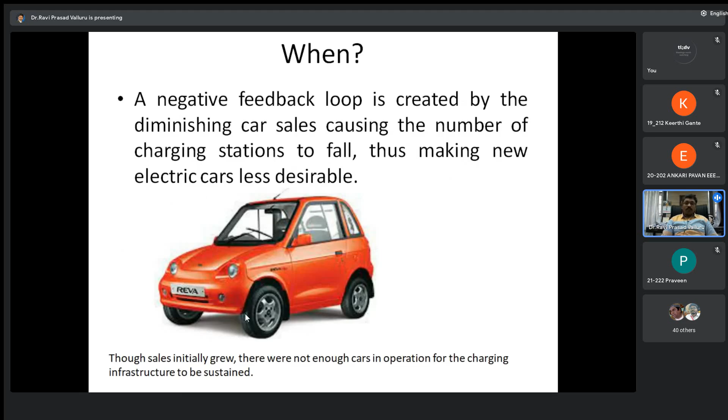So next is what, in the 5 W's and 1 H - we have seen when, where, why, what. Let's see the 'what if' condition once again, because you must know the importance of changing the thought process, changing the psychology, changing the mood, setting the pace. So what if there are more charging stations? We must ask questions to ourselves to find answers. Being an engineer, we must question ourselves and find answers.

What if there were more charging stations? Obviously, more buyers will come forward to buy cars, so automatically a positive feedback loop will start and sales will increase.

What if there were options to swap battery at regular intervals of 200 kilometers across the entire country? Then obviously I'll not have fear of charging, wasting 90 minutes of my time. I can swap my discharged battery with a fully charged battery, so customer confidence will increase. I hope you understand the importance of questioning ourselves to find solutions.

What if old EV scrappage and battery recycle facilities are rewarded? Now, whoever purchased electric scooters has to change the battery every 3 years. Old battery versus new battery, the cost difference is somewhere around - old battery gets you 800 rupees, new battery is 13,000 to 14,000 rupees for normal basic entry-level scooters. I hope you understand the price difference.

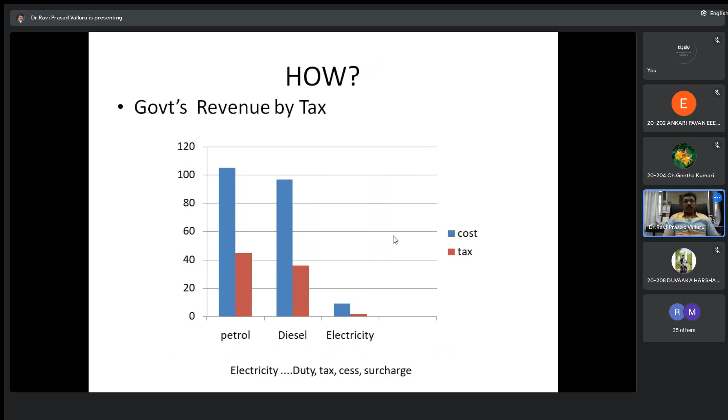So from dealer point of view, there is hope. Dealers want to switch from petrol pumps to electric chargers, because the margin is not getting affected. But why is the customer not shifting from petrol cars to electric cars? That is the question already I have posted. When, why, all these things I have posted.

So I hope you are getting clarity of all the stakeholders. I'm telling some of the overall fears, why electric vehicles are not sold in large numbers like petrol cars and diesel cars.

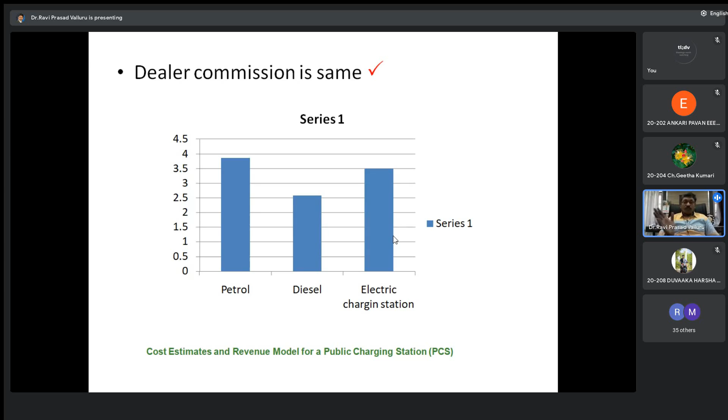There are a lot of petrol and diesel cars, 140 crores. There are only 1.4 million electric vehicles. I'll show you some interesting statistics. As an engineer, we must read newspapers, we must listen to news, we must see the business part of the newspaper, maybe in the seventh or eighth page.

So now my question is, who is responsible for all these things? I told you when, what, why, how, all these things. Now the question is, who is responsible? Yes, automatically engineers and technocrats are responsible.

All of you young engineering graduates, you are responsible for making EV successful. Engineers and technocrats are responsible. So the EV revolution will require more engineers. That is the reason why Naresh has arranged this seminar.

I hope you understand why the seminar is organized, why your institution has an Institution's Innovation Council, IIC. Because until and unless we don't come up with new ideas for old problems and new solutions for existing problems, we cannot overcome this hurdle. The hurdle is there are fewer EVs and more IC engine vehicles. IC engine means internal combustion engine. So the EV revolution will require more engineers. That is the first benefit.

Next thing is, electric vehicles are part of the fourth industrial revolution. If you had studied your history, geography, economics, civics properly in 10th standard, you would know what is meant by industrial revolution. Now the world is going through the fourth industrial revolution, and that revolution is brought by electric vehicles and the electric power industry.

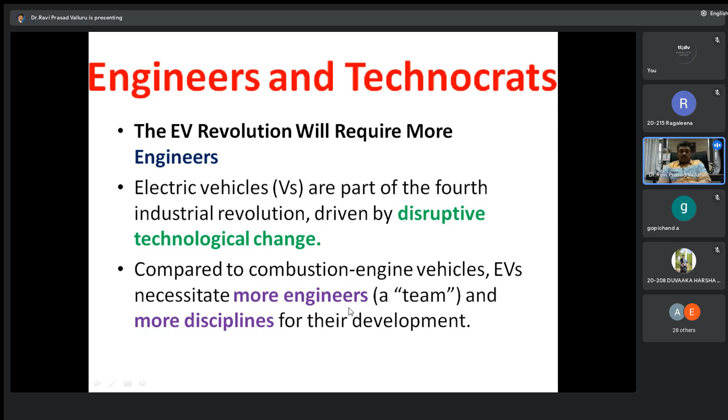Point 3 in this slide - I told you EVs need more engineers. Okay, why are more engineers needed? Why regular petrol and diesel cars? In a regular petrol car and diesel car, an engineer designs the valves once. A technician, a diploma holder or ITI holder will make them using a lathe in a workshop.

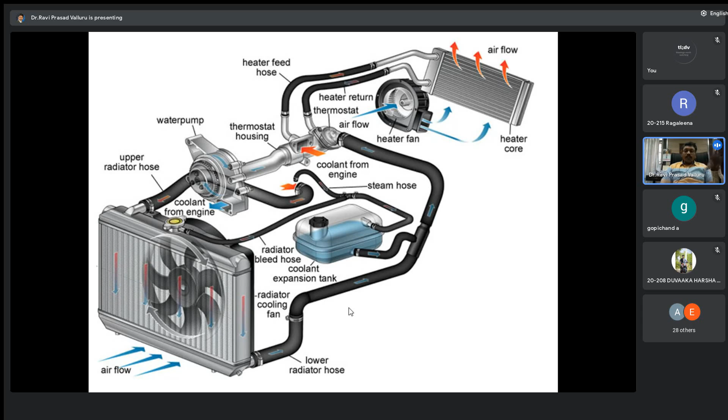Okay, this is the cooling system. The engine gets heated up because petrol or diesel gets combusted inside the engine, and the engine has to be cooled. So this is the radiator, the coolant, and the coolant pump mechanism in a regular car or lorry, whatever it is.

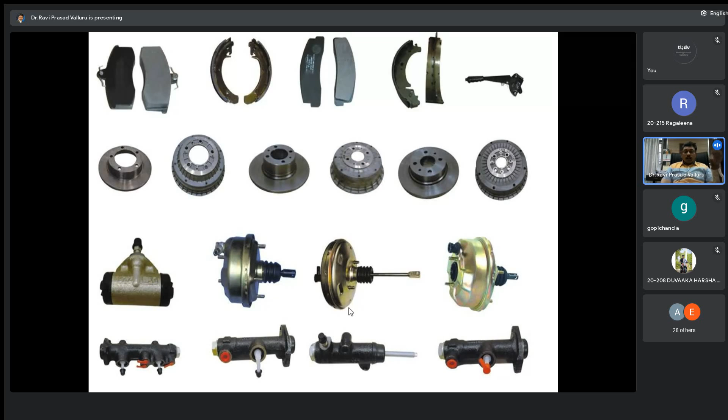So this is the braking system in a regular car - we call it power brakes. There has to be a brake cylinder, brake distributor, disc brakes, drum brakes. All these brake lines have to be connected, and the brake distribution has to be done. This is the mechanical setup in regular cars, and these are the parts: brake shoes, brake pads, brake drums, cylinders, valves, all these things. So many parts are there in this braking system.

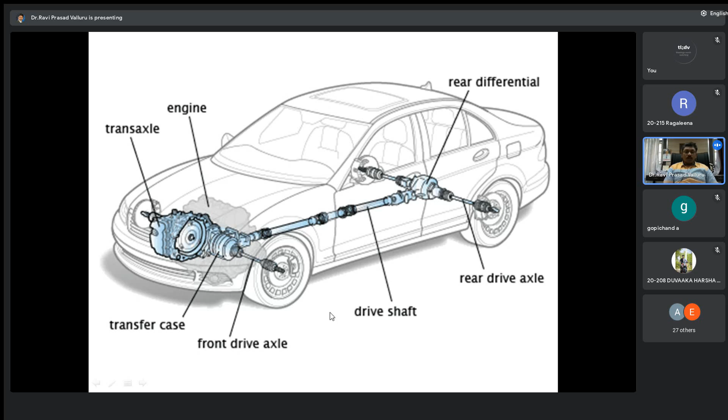But majority of modern cars are front wheel drive. This is a four-wheel drive car, so the engine is connected to the rear wheel as well as the front wheel. Only front wheel driven we call front wheel drive, only rear wheel driven we call rear wheel drive. If it is driven by all wheels, we call it AWD, all wheel drive, or generally 4x4, meaning all four wheels are connected to the engine.

This is a rear wheel drive axle. It has a lot of parts, and all these parts have to be manufactured by lathe machine operators in a workshop. You would have done the lathe workshop in your first year.

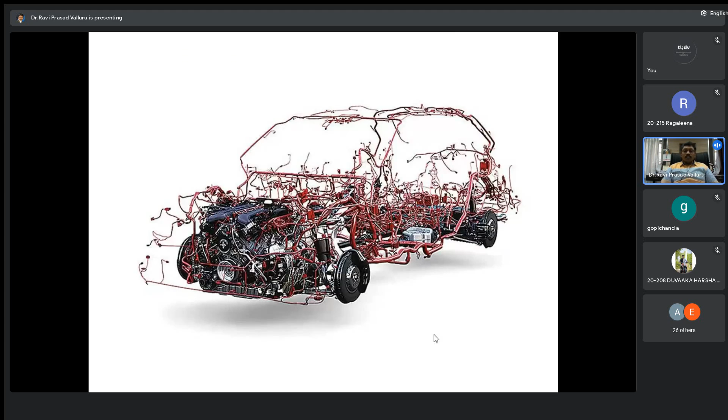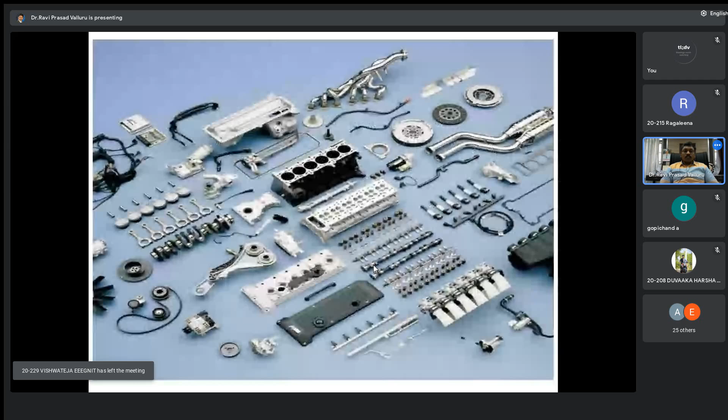I hope you understand, this is a regular car, and a regular car needs hundreds, thousands of parts. I am showing this briefly.

Dear students, did you understand what I mean to say? Yes sir, this is all about regular cars.

Very good. Now I want you to unlearn, to relearn.

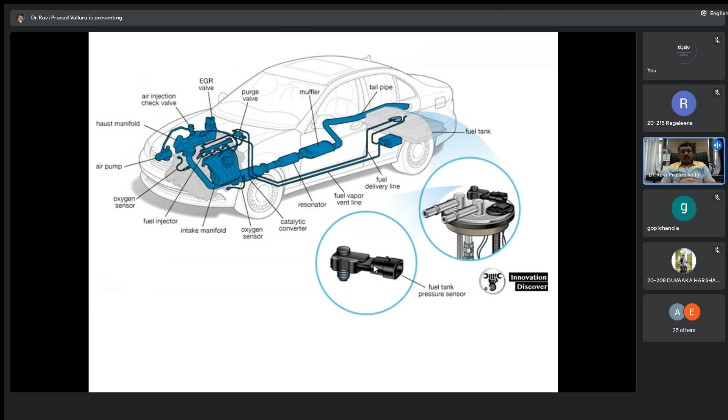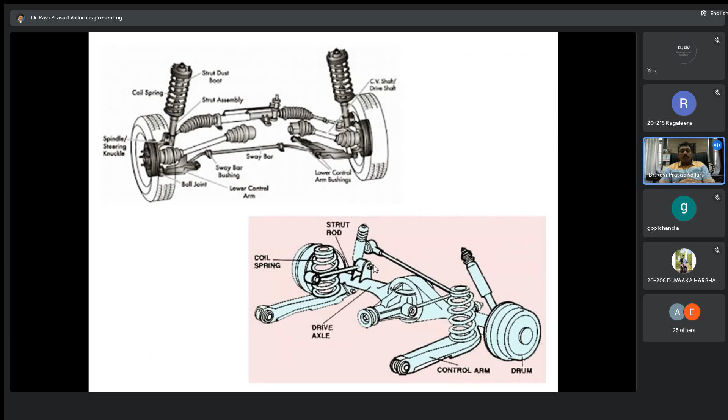This is the old knowledge: this is how AC works in a regular car, how flue gases come from the tailpipe, how wiring is done in regular cars, how the rear axle is, how power is transmitted to wheels, how suspension is, how brakes and brake distribution are, how the engine is cooled, how the gearbox looks, how the engine looks with its parts.

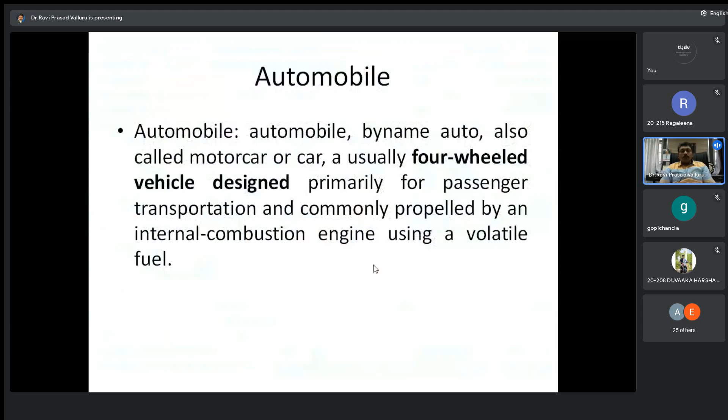I want you to unlearn all this. Forget about these things, because we are talking about electric vehicles. These things do not exist in EVs, only some of them exist, many of them don't. So I don't want you to fail. Whatever I have taught you, you have to forget those things. If you want to relearn, you first have to unlearn.

So I request all of you to unlearn, and then let's start relearning. I don't want you to fail as an engineer in life, and I don't want you to fail as a startup if you start your business. So please unlearn whatever you have learned till now, and then relearn.

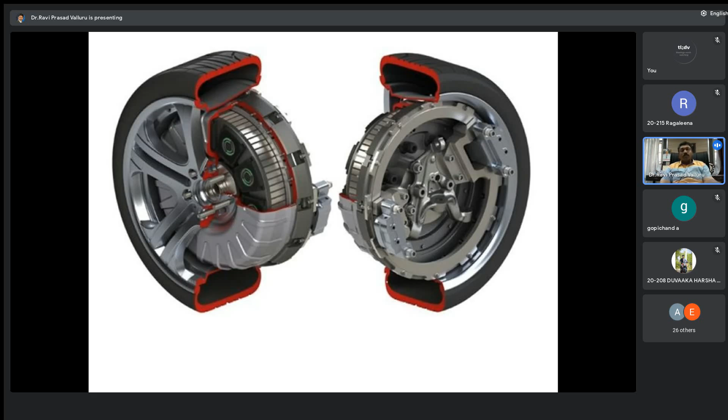The tire and rim are part of the motor. So the tire and rim form the rotor, and the stator part is visible. I hope you can see this. This is what I wanted to convey.

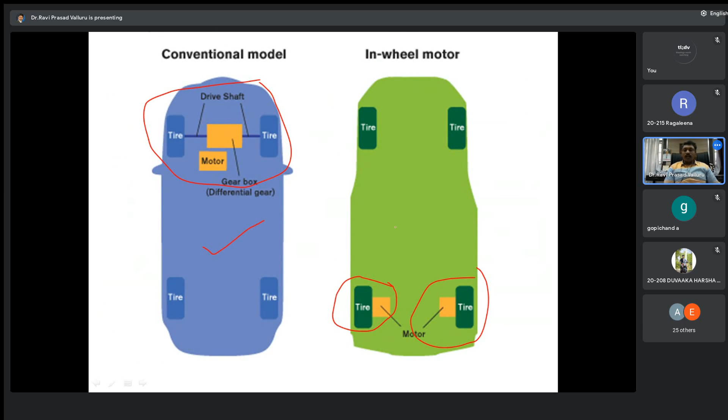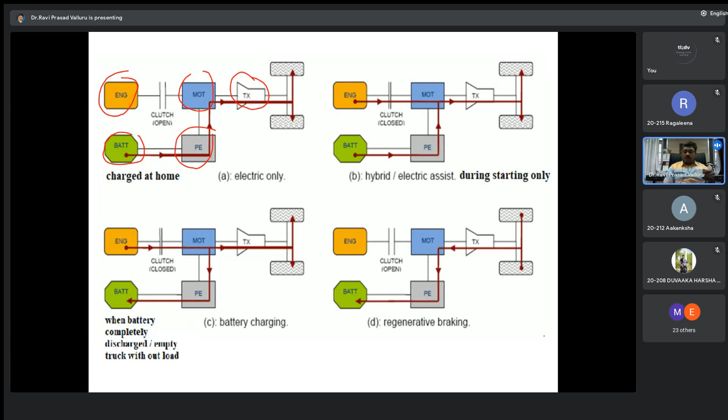A hybrid vehicle is costly because it has a petrol or diesel tank, an engine, a transmission, gearbox, clutch, all of them. Additionally, they have a motor, power electronic converter and battery. That is why hybrid electric vehicles cost in crores, electric vehicles cost in lakhs, and petrol vehicles cost in a few thousands. I'll show you that price variation also.

So this is a simple way of understanding conventional, hybrid, and pure electric vehicles. The first classification is conventional. Dear students, are you able to see the screen I am sharing, and what I am scribbling with the pointer? In conventional vehicles, that is petrol and diesel, you can start and stop, and it runs on petrol or diesel.

In mild hybrids, it runs on petrol and diesel, but when you apply brakes, or when you are coasting, or when descending from a hill, energy is recovered. Please mute yourself, we are getting noise. So energy is recovered in a mild hybrid during coasting, braking, or descending from a hill.

We call this mild hybrid. In regular conventional vehicles, there is no such recovery; when you apply brakes, all that kinetic energy is lost. But in a mild hybrid, when you apply brakes, some energy is recovered and stored in the battery, and it is charged only momentarily—not for days, just for 2 or 3 seconds—and given back in 2 or 3 seconds. So this happens in less than 1 minute.

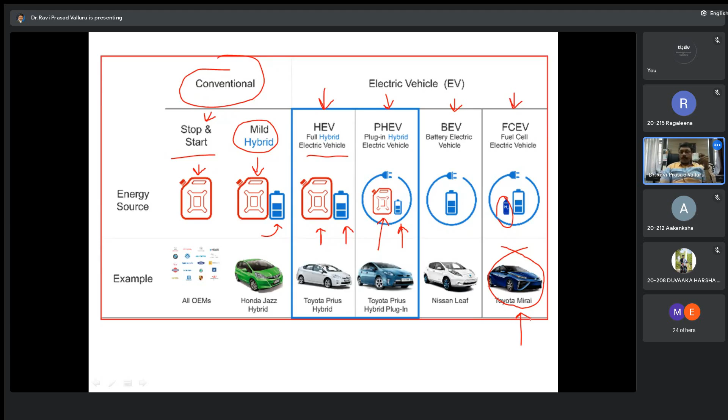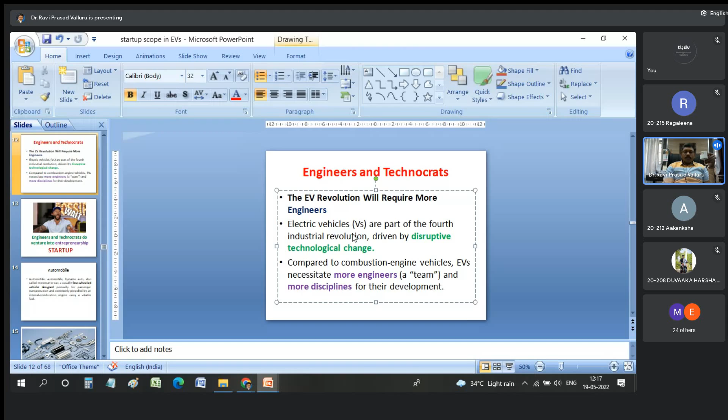Dear students, are you able to follow what I am saying? Because it's a very elaborate, very detailed topic. Do you understand? Yes, sir. Do you understand what I am saying? Are you able to follow? Yes, sir. Very good. Shall I go ahead with my presentation?

Naresh, time is 12:15. Can I continue with the presentation, or is there any time limitation? Dear audience, can I continue? Do you have any other lecture or lab session? Can I continue? Continue, sir.

Okay, thank you. Is my lecture interesting? Because it's a very elaborate topic, I have to concise it and present it for you, because you are all first year, second year guys. You don't know the ABC of electric vehicles - I have to cover that as well.

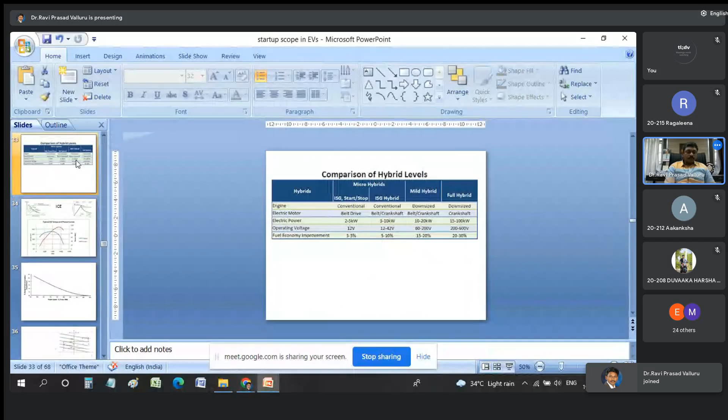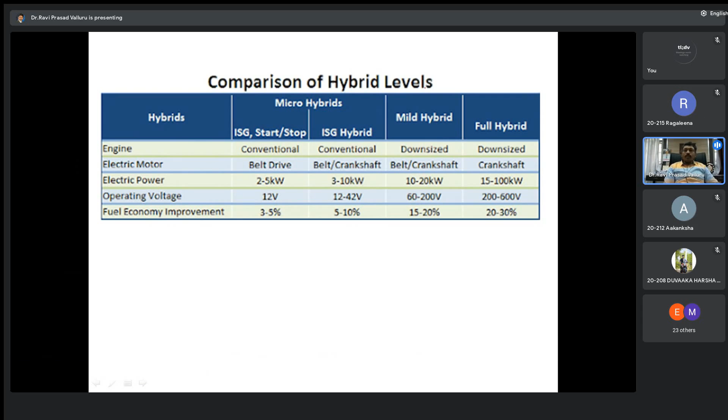So let's see, let's get back. Are you able to see the screen I am sharing? Yes, sir. Good. So now let's see comparison of hybrid vehicles - how regular vehicles differ from hybrids, how hybrids differ from battery vehicles, and how battery vehicles differ from fuel cell vehicles. I've shown you a short glimpse of this.

In a similar manner, I would like to show you in terms of electric power. People have some misunderstanding or lack of information. All these three cases are very dangerous - half knowledge is very dangerous. So it is my duty as a teacher to give you some idea.

Micro hybrid vehicles only have 2 to 5 kilowatts of power. For example, a car needs somewhere around 70 to 90 horsepower. When you convert horsepower into kilowatts, 1 horsepower is about 746 watts.

Prasad, sir, Naresh, shall we continue? Sir, your voice is not clear. Okay, am I audible now? Is my voice clear now? Yes, sir, it is audible. Shall I continue because time is 12:15? Am I messing up with your schedule? Shall I continue? Yes, sir, you can continue. You can end around 12:35, sir. Sure, I'll speed it up.

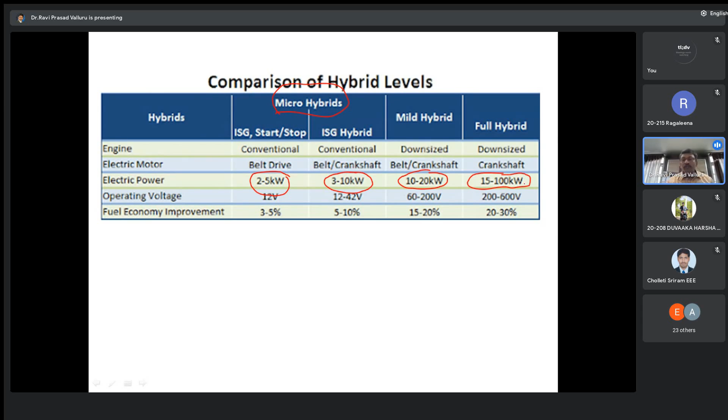I request the audience to understand how much support is given by the electrical system to a regular engine. In micro hybrid, only 3 to 5% support comes from the motor. In ISG hybrid, 5 to 10% support. In mild hybrid, 20% support comes from batteries and motor. In full hybrid, the entire power required for propelling the car is generated by the motor, and the motor gets power from the battery - whether it's fuel cell, lithium-ion, or lead acid, it doesn't matter. I request all of you to understand how much support we are getting.

Now let's see the internal combustion engine versus electric motor. If you want to understand the startup opportunities in electric vehicles, you have to understand how a regular geared petrol car is different from an electric car. You can see both graphs on the top left corner, for electric motor driven cars and IC engine cars. You cannot keep the same amount of torque - with changing speed of the car you have to change gears, as you can see with first, second, third, fourth gear. Whereas in an electric car, the torque is seamless and maintained very well.

If you are unable to understand in this diagram, you can see this. From up to some point, you can run the motor as constant torque motor. After that, you can run it as constant power, variable power, constant power. This is the advantage of electric vehicle, which is not available in a regular petrol or diesel car.

For getting this kind of constant torque and variable torque, or constant power and variable power features, you have to shift the gears. Torque and speed are not constant, torque and power are not constant in all the gears. You have to run the engine at ideal speed, and you cannot run the engine at ideal speed without increasing the speed of the car. It is not possible in traffic.

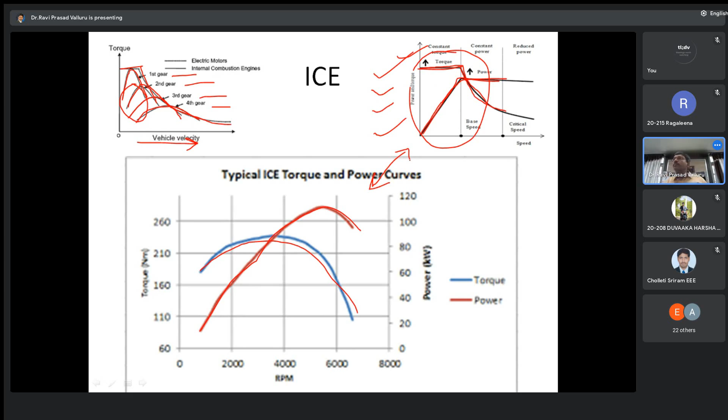You can see the difference between the petrol cars and the motors. This is where you can identify how the fuel efficiency drops in petrol cars. This is where we have opportunity.

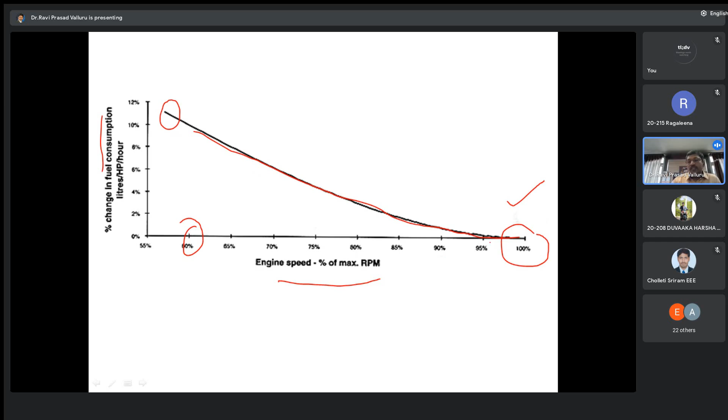You can switch from forward motoring. If you are a second, third, or fourth year student, you will know what is forward motoring and forward braking. This is the speed-torque characteristics of a DC motor. This is speed, this is torque. This is negative torque, you can say this is minus T. Speed is always positive, but torque is either positive or negative.

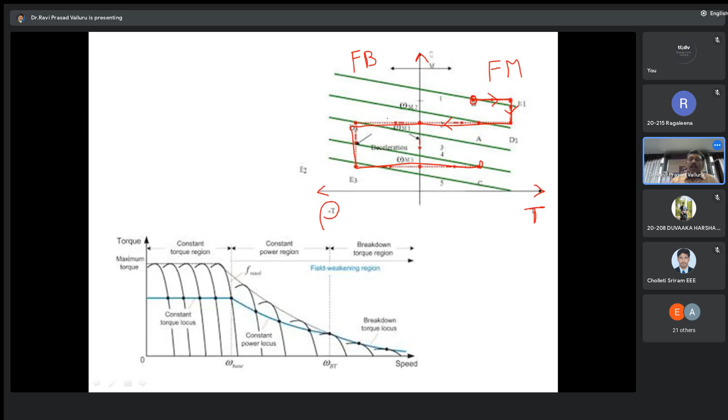So if your motor is operating in forward motoring, you can switch it to forward braking in this manner, and you can stop the car and once again start it from a slower speed. This is the path. This is not like your regular IC engine, this is not like your regular brakes. This is called electrical brakes. This is how we can switch from forward motoring to forward braking efficiently, effectively, without a short gap also.

You can reduce the speed. Say for example, it is running at 100 kilometers at this point. You can immediately switch it to 10 kilometers in a short notice. You can bring it to here. From here to here, you can reduce the speed using this method. This is taught in the PSD subject. This is how your motor operates.

This is the speed-torque characteristics of an induction motor. This is how speed control is done. Some of you may be familiar with speed control: constant torque region, constant power region, breakdown torque. These are different speeds of electric motor, and electric motor is used for electric cars.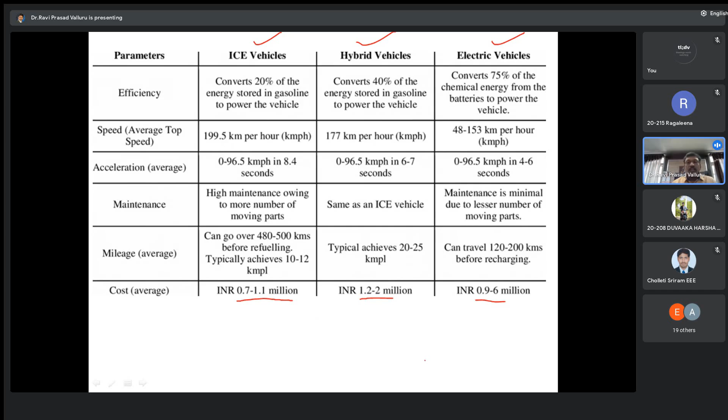Once again, in electric vehicles, we also have fuel cell based vehicles. So I'll share this presentation with Naresh, you can read it when you are free.

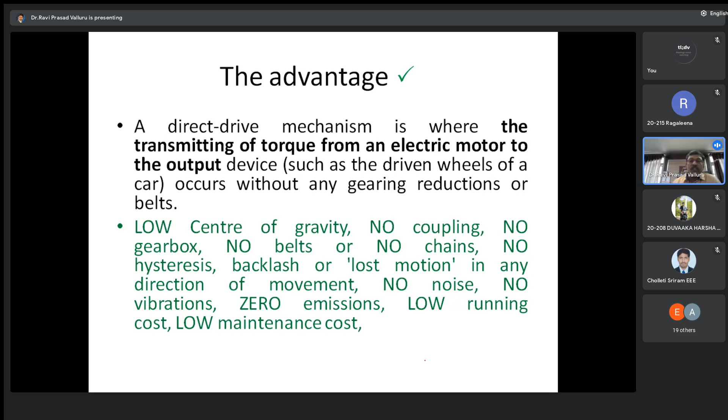So now there are a lot of advantages of electric vehicles: low center of gravity, no coupling, no gearbox, no belts, no chains, no hysteresis, backlash, or lost motion in any direction of movement, no noise, no vibrations, zero emissions, low running cost, low maintenance cost. These are all advantages of electric vehicles. So the future belongs to electric vehicles, there is no doubt.

Mild hybrids are already in the market, like Mahindra Scorpio and Maruti Ciaz. Many battery assisted hybrid vehicles or power assist hybrid vehicles are there on the road, even in your college parking space. Go and find a micro hybrid and discuss with the owner of that car. He will give you very good insight.

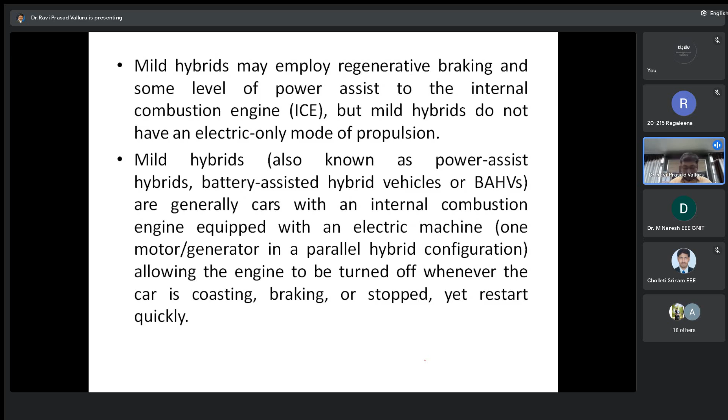Sorry, Prasad sir. Yeah, already time is over. Yes, last two minutes. It's already past time, around 12:30 only. It's over, it's over. I'll wind it up quickly.

Dear students, dear participants, dear audience, I want you to do SWOT analysis. SWOT analysis is strengths, weakness, opportunities, and threats. I hope you have seen why, when, where, how, what - all these things. I've shown you the difference between IC engines, hybrid cars, and electric cars, and shown you all those things in electric cars. So I want you to understand the opportunity.

There is opportunity here to start a business. I'll take you briefly through this, the main part of our seminar. Whatever we have studied till now is all basics, because I don't know the level of the audience, so I had to tell you all these things. I hope you understand - you have reached somewhere around 67% as far as I'm concerned. I taught you somewhere around 60 to 65% from my point of view. I don't know how much you understood and how much is your knowledge level.

From this point onwards, it is self-driven. You have to find opportunities, meet people, interact with people, and explore. This 30% of the next journey is in your hands. You have to read well, learn well, understand the subject, read newspapers, listen to the news, talk to experts, go to various showrooms, visit electric cars, and try to understand the technology behind it. From this point onwards, it is in your hands. My job as a teacher is to take you past the halfway mark - 50% crossed, so we are close to 60%.

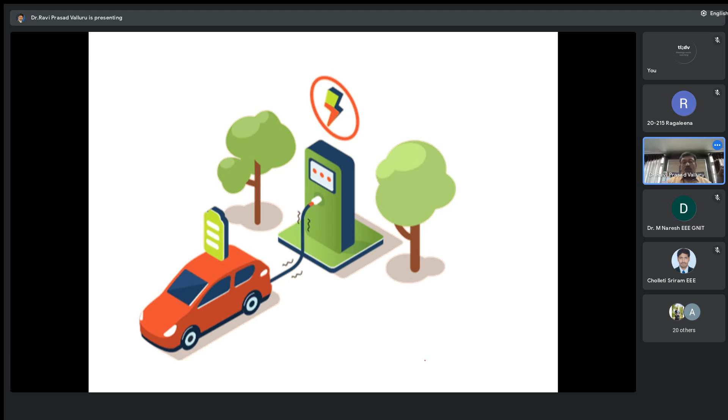So now, where are the opportunities? Charging infrastructure - we have to set up chargers on highways so electric vehicle owners can charge their cars by paying some amount. This is opportunity number one. We have to supply chargers to such franchises. At present, it needs 90 minutes to fully charge, so there is possibility to do marketing and manufacturing of chargers.

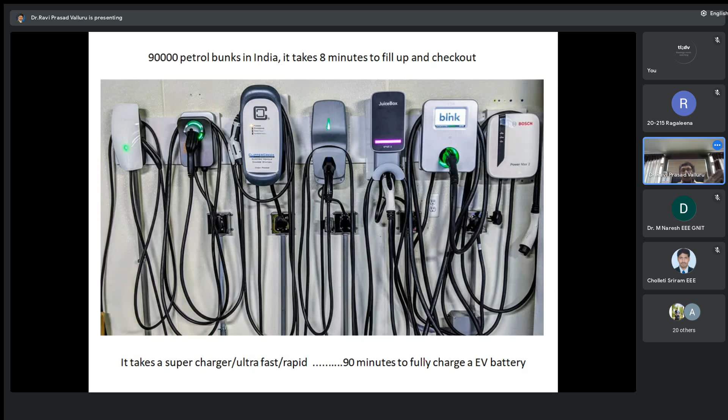At present, there are around 90,000 petrol bunks in India. It takes 8 minutes to fill a car, collect the money, and send the car out of the petrol pump. But an electric car needs 90 minutes to charge. So if you get 100 cars, you need 100 chargers. In a petrol pump, you have only one pump and can still fill 100 cars, but electric chargers are different - if you get 100 cars, you need 100 charging outlets. Please understand, that is the reason there is a lot of opportunity for charging stations, chargers, charging cables, and charging plug points.

I'll give you a brief example. India needs somewhere around 10,000 charging stations per year in the coming years. You can ask me, sir Ravi Prasad, how can you say India needs 10,000 chargers? I'll give you an example.

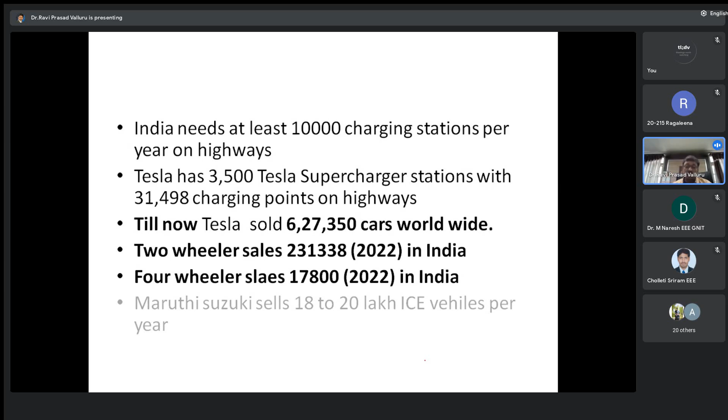I think Tesla is the most successful car company. Tesla has sold only 627,000 cars worldwide till now - you don't believe it, okay. Tesla has only 31,498 charging points on highways across 3,500 charging stations. This current year in India, only 231,000 bikes and 17,000 cars are sold, whereas petrol diesel cars number 20 lakh. So you can see the difference - there is a lot of potential.

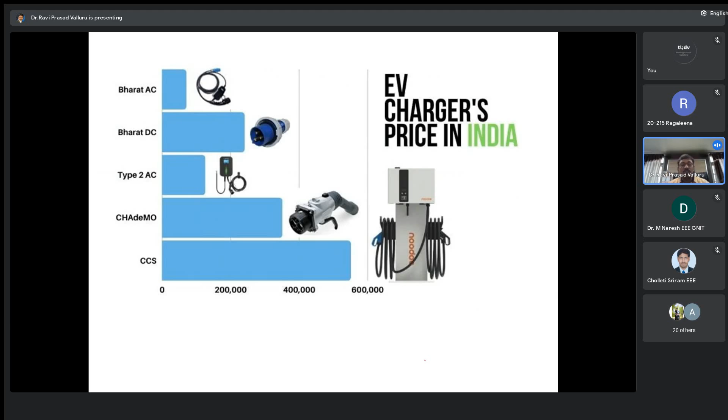You can manufacture plugs as an engineer. These are the standard types of charging plugs used - not your regular plugs. You can't just go to any electric shop and buy them. So there is huge demand for manufacturing these plugs. As an engineer, you can start a factory and manufacture these types of plugs.

Next, electric cables are not like your regular household cables - they are TUV certified cables. So I suggest there is an opportunity to start EV cable manufacturing. Electric vehicle charging cables are different - their standards are different, their insulation is different, their operating voltage is different. We have AC and DC charging. So there is opportunity to start a business.

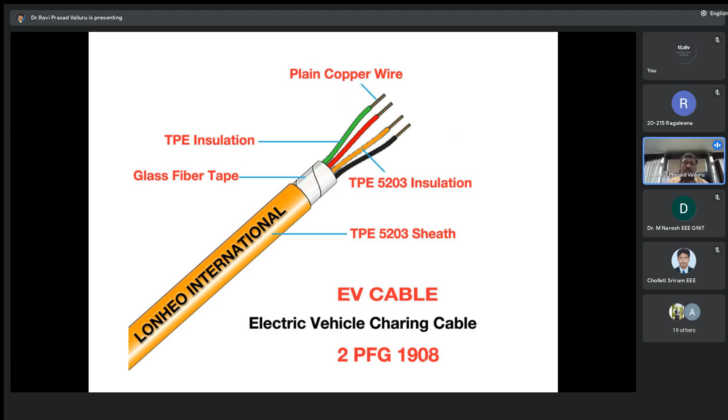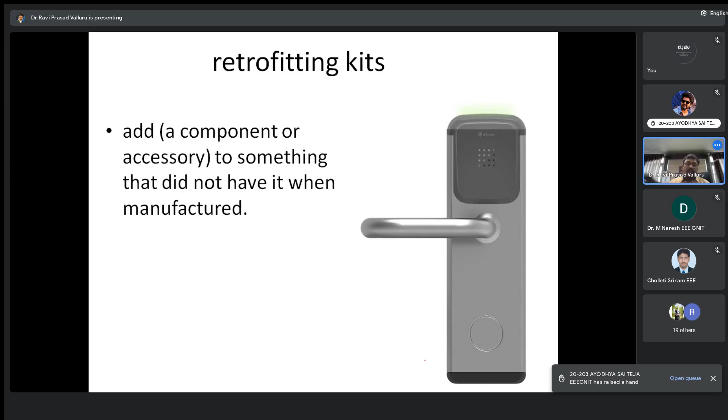Next, there is opportunity for making retrofitting kits for existing cars. Retrofitting is something not supplied by the company - you take an old car and fit it with retrofitting. So retrofitting uses a cylindrical battery.

Electric battery needs cooling. So if you want to travel for a longer journey, or travel in hot conditions, you have to retrofit. You have to fit some extra cooling fans.

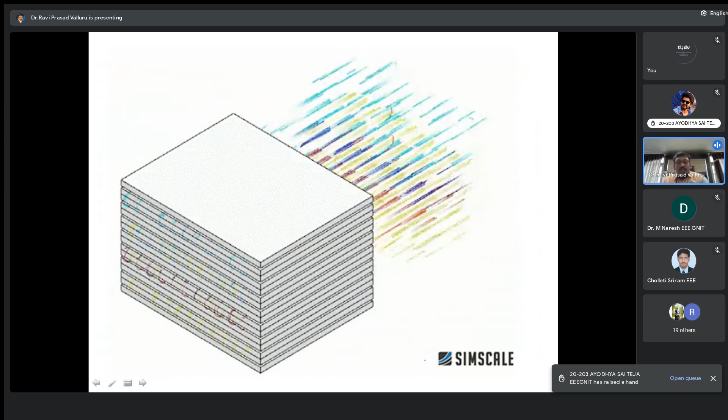So it's a new business in electric vehicles. These are prismatic cells, or even pouch cells, they also need cooling. So you have to do some kind of mechanism to cool the batteries.

You can sell that mechanism as retrofitting. Retrofitting is addition to an existing car. So there is opportunity to sell conversion kits.

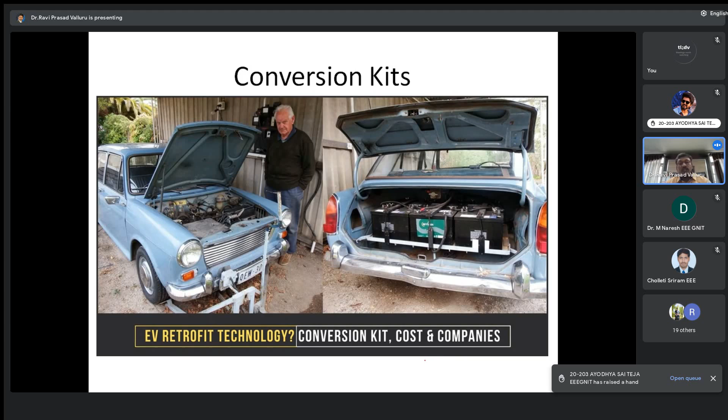You can convert existing cars into electric cars by retrofitting it with motor and battery. Remove the engine, fit a motor and battery. So you can also design and make a conversion kit, and sell the conversion kit to existing cars.

This is GoGoa1.com. They are selling conversion kits. These kits can be used to convert your existing bike into an electric bike. This is a very good business model. You can take the example of GoGoa1.com.

And even in Hyderabad, we have this conversion kit factory. They are converting existing petrol and diesel cars into electric cars.

So next, trading. Electric vehicles need a lot of metals. There is possibility of moving into trading of metals, especially aluminum, which is a very important ingredient.

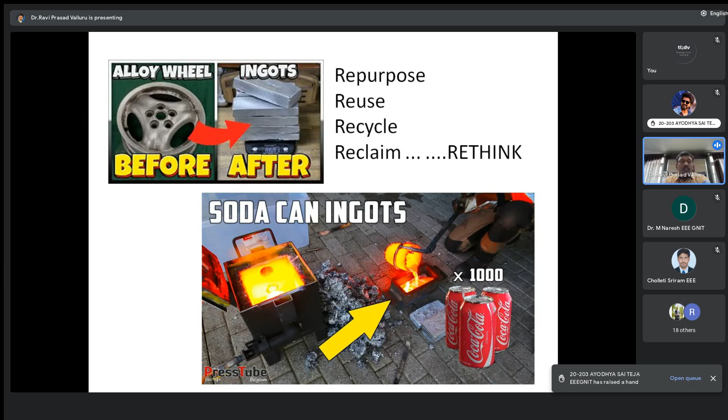So whether it is repurpose, reuse, recycle or reclaim, now it is time to rethink. You can take old aluminum and convert it into ingots, and these ingots are used for making electric cars. Aluminum is the important metal because your electric vehicle has to be very light.

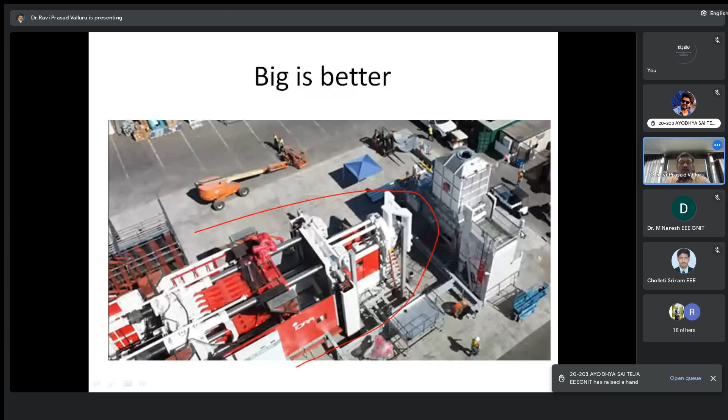So next, big is better. This is a gigapress used by Tesla. Earlier, people used to think that a car is manufactured from small panels. Now the thought process has changed. Tesla introduced the gigapress; they were able to remove 370 parts.

A single piece of chassis is fabricated in this gigapress. This is a very big press. You can see the size of human beings compared to the size of this gigapress.

So this is what I'm talking about, disruptive thought process. This is a single molded aluminum chassis or platform for Tesla cars.

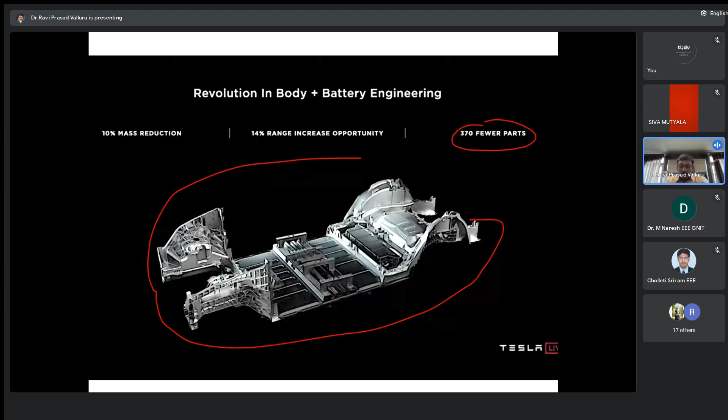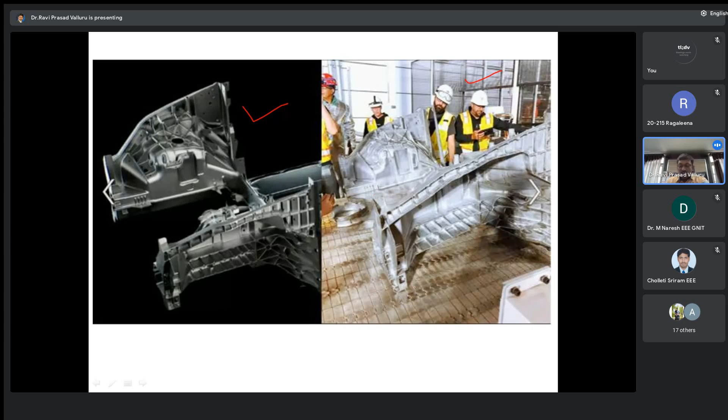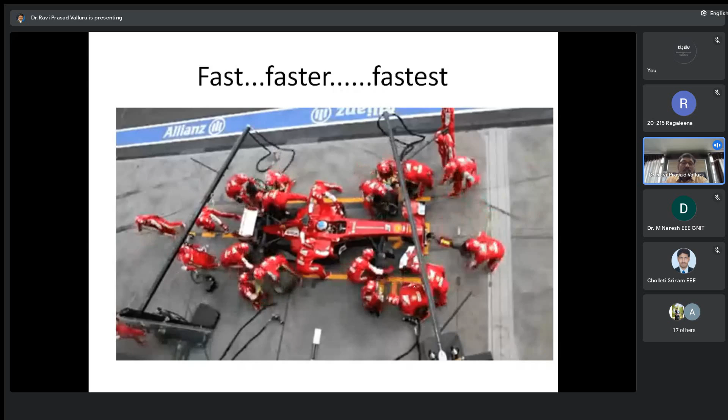Now, fastest cars, fast servicing, fast swapping - all these things are very important. I hope you all know the F1 pit stop, how quick it is.

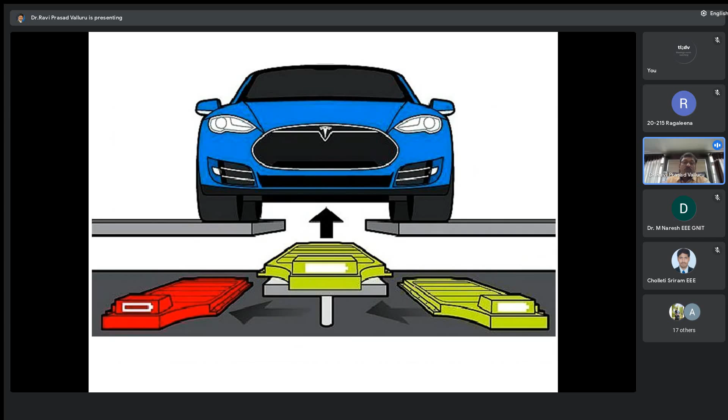Now people are talking about how they don't have 90 minutes to charge the battery, but they have 9 minutes to swap the battery. Tesla is promising to bring in battery swapping.

On the left side, this discharged battery is replaced with a charged battery on a platform. This is the promise given by Tesla, battery swapping. And battery swapping is already initiated in several densely populated tourist places.

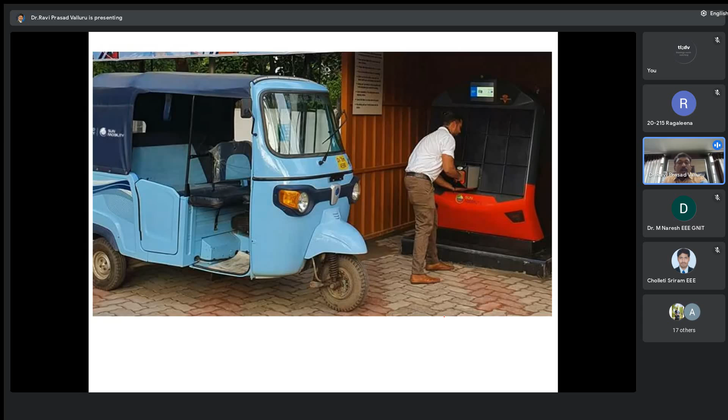You can take the battery from your auto and put it on charging, and take a fully charged battery and load it. It takes less than 9 minutes to swap the battery. So there is opportunity to start such a business, battery swapping business.

You can start battery franchise, battery charging franchise also. This is an example - Tata is offering battery franchise. You can take it up as a business. If you have a shop, just install a battery charger outside the shop.

You will update it in Google Maps and the electric charging infrastructure app provided by the National Highway Authority of India and the Bharat electric vehicle policy. Automatically, whoever is in need will come and get their vehicle charged.

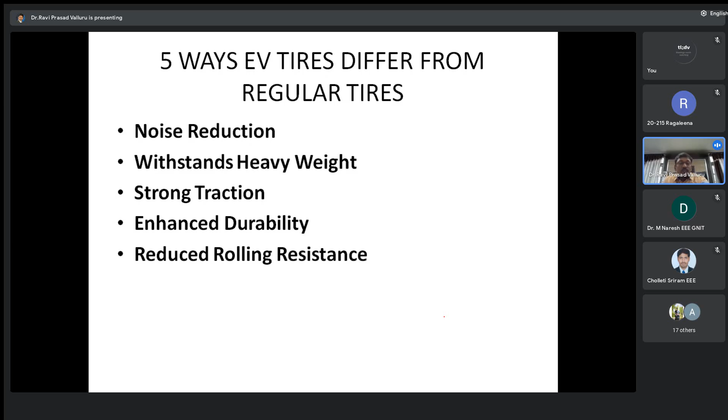Electric vehicle tires are also different from regular tires. So you can start tire manufacturing because it is disruptive. They are not like your regular car tires. Electric vehicle tires are a little bit different - I don't say they are completely different.

So next, cabin cooling. Already I told you all cars have air conditioning, but electric cars' air conditioning is different. It is based on the Peltier effect.

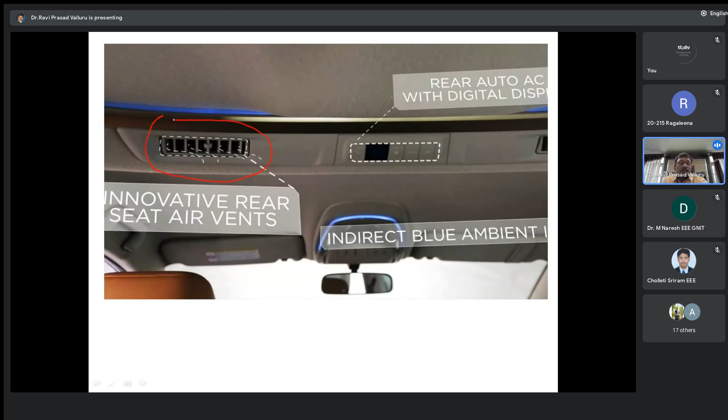So the disruptive thought process is, you cannot have a single AC and pump air through to all three rows of seats. Now you can use this Peltier effect and produce cooling locally.

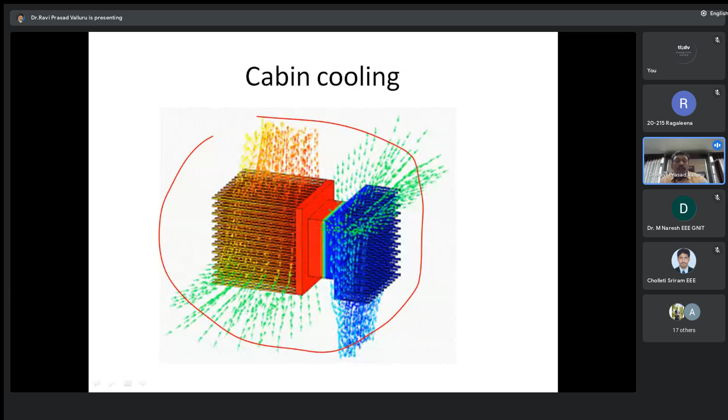If the car is very big, you can have 3 or 4 air conditioners in the same car. You can turn on only one depending upon the requirement.